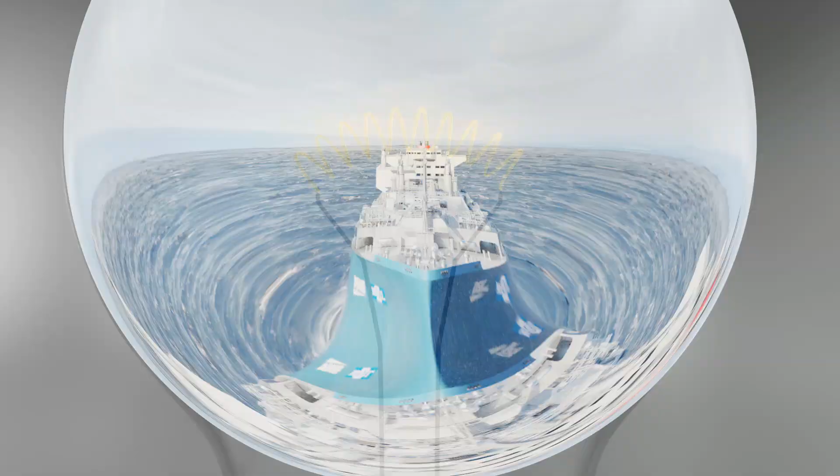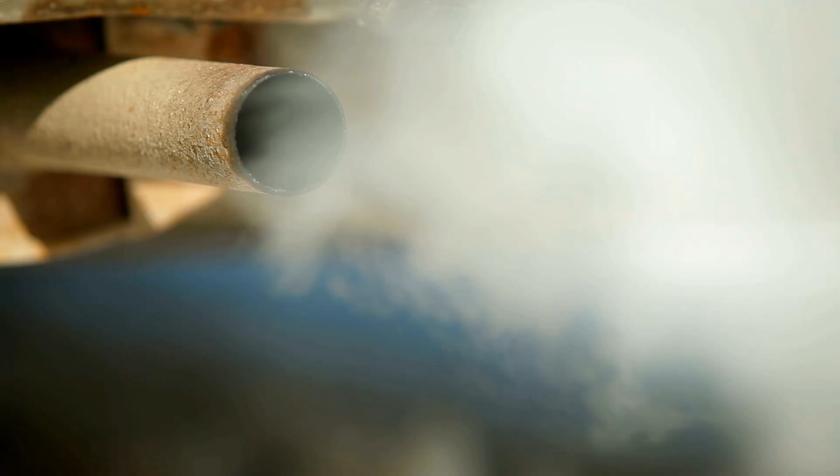In a world striving to balance continuous economic growth with reduction of greenhouse gas emissions, LNG is a realistic and reliable energy solution for mitigating CO2 emission. However, the energy loss within the LNG supply chain has been an issue.

DSME, the leading builder of industrial ships, and MOL, a top-class international shipping company, have jointly developed a new LNG regasification technology. It can reduce fuel usage and environmental impact by utilizing the cold energy from LNG.

This technology has secured the official approval of the Classification Society. And for the standard design, HAZID, HAZOP, and RAM study were conducted for verification of standard design.

CPR was developed based on DSME's proven technology for LNG system and MOL's excellent experiences in LNG vessel and FSRU operations. When this technology is adapted to FSRU, the fuel consumption and CO2 emissions are reduced significantly. Approximately 55% of reduction is possible depending on the temperature of the seawater.

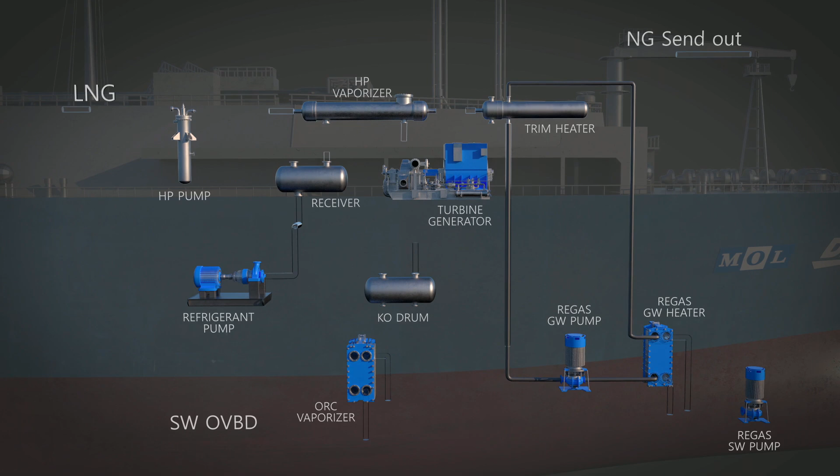This system is derived from the organic Rankine cycle. In terms of thermodynamics, it is similar to a power plant utilizing steam turbine. The process uses commercial refrigerant as a working fluid. Heat from seawater is transferred to LNG for LNG regasification.

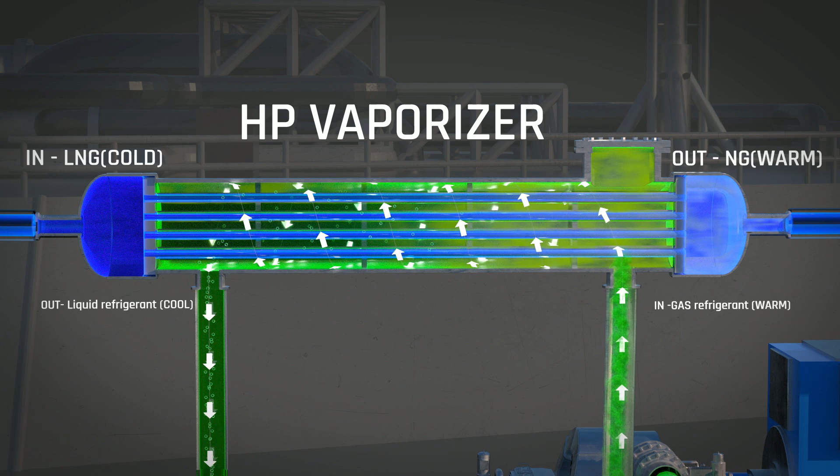In the HP vaporizer, the warm refrigerant vapor is cooled down and condensed by exchanging cold heat with LNG. Then the liquid refrigerant is pressurized by refrigerant pump and vaporized by exchanging heat with seawater.

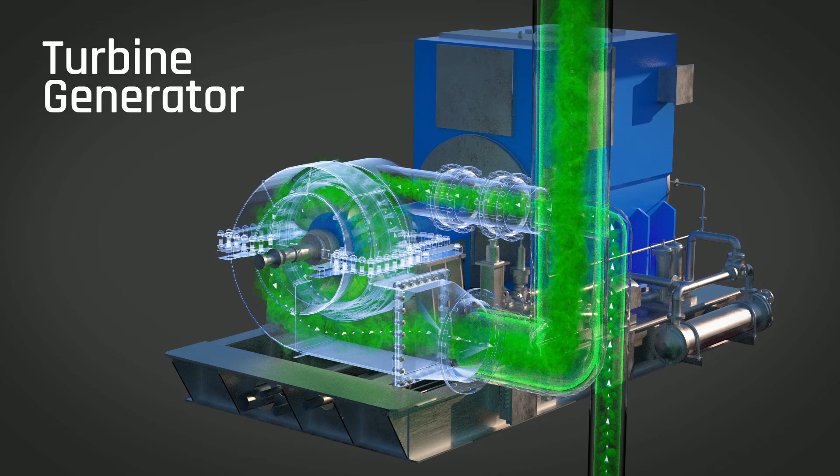The kinetic energy from this high-pressure gaseous refrigerant is applied to rotate a turbine impeller, and an alternator produces high-voltage electricity.

DSME's long-standing expertise in regasification technology and MOL's experience in FSRU operation were combined to derive the best design. The verification was completed through a pilot-scale test prior to applying the technology to the commercial project. And the lessons learned through operating the experimental facility were reflected in the standard design.

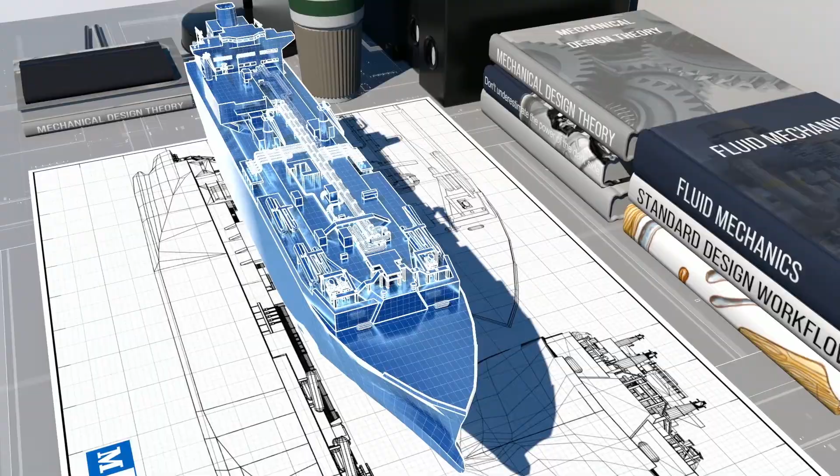To verify standard design of CPR system, a small-scaled pilot test facility was constructed at DSME's Energy System Experimental Center. This center is located at DSME's Okpo shipyard, and it is fully equipped to conduct actual LNG test.

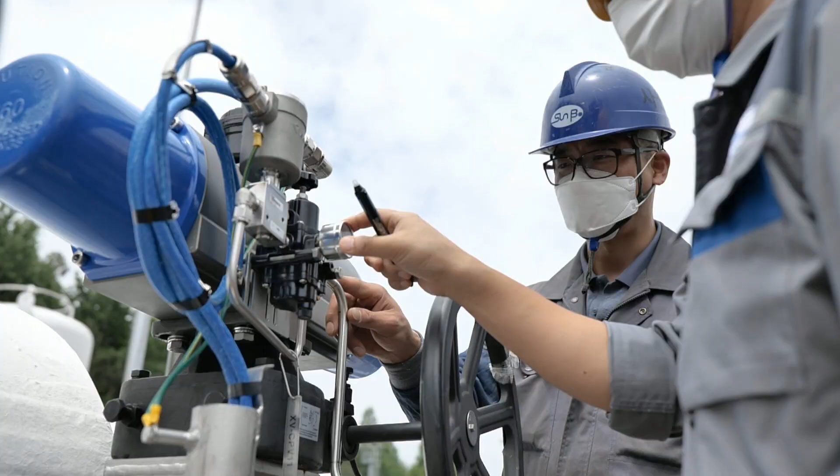In order to compare the theoretical design and actual plant behavior, DSME and MOL performed in-depth tests for various operating conditions, including abnormal situation. And the results were logged and analyzed systematically.

All measured data from the pilot plant are logged on a data server that is located remotely from the Energy System Experimental Center.

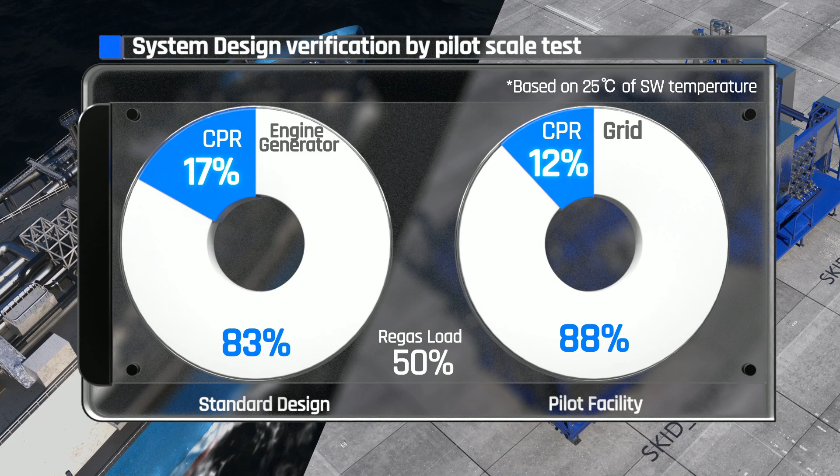With various regasification load, the electrical consumption was compared for the standard design and the test result. And also the difference of turbine output depending on the seawater temperature verified by CPR pilot facility.

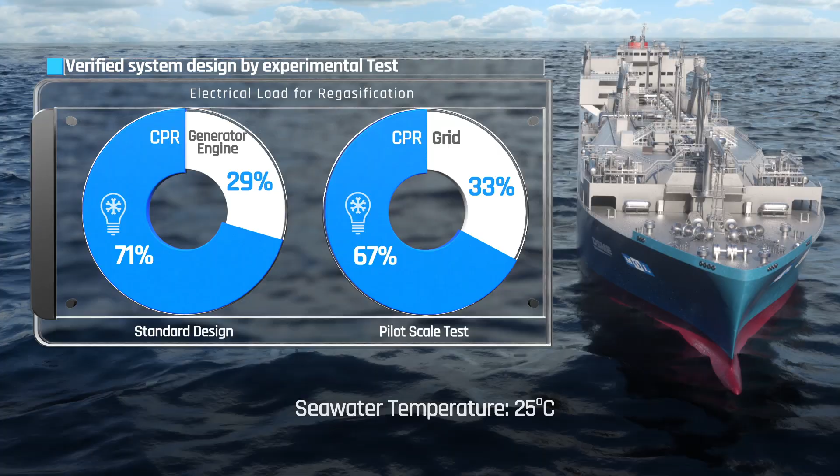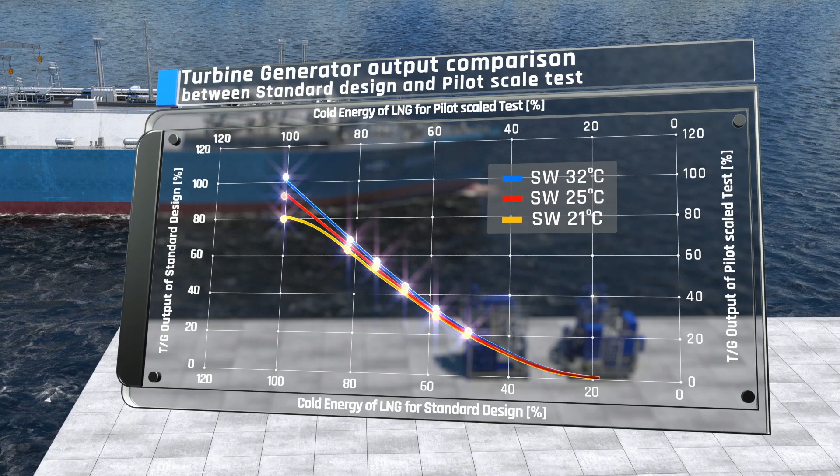As indicated in this graph, the recorded performance of the CPR pilot plant was consistent with the theoretical expectation within error bounds. Consequently, the cryo-powered regasification system could be fully verified.

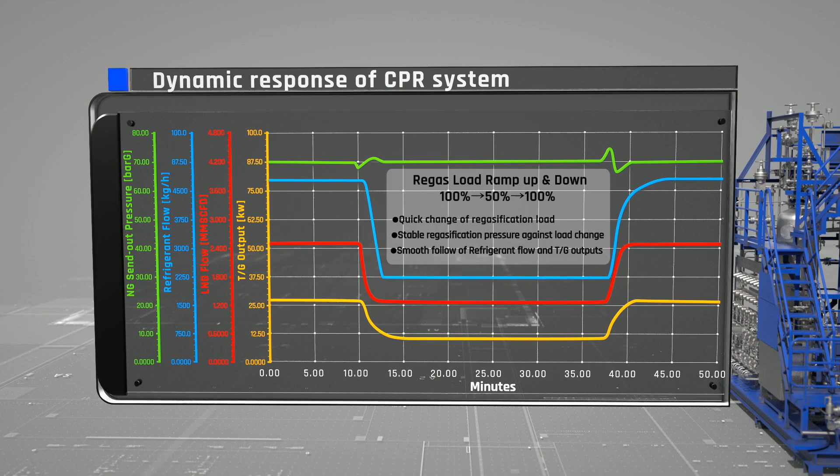Developed process control logic using dynamic simulation is applied to the test facility. Eventually, the dynamic behavior of actual system could be verified by the pilot-scaled test.

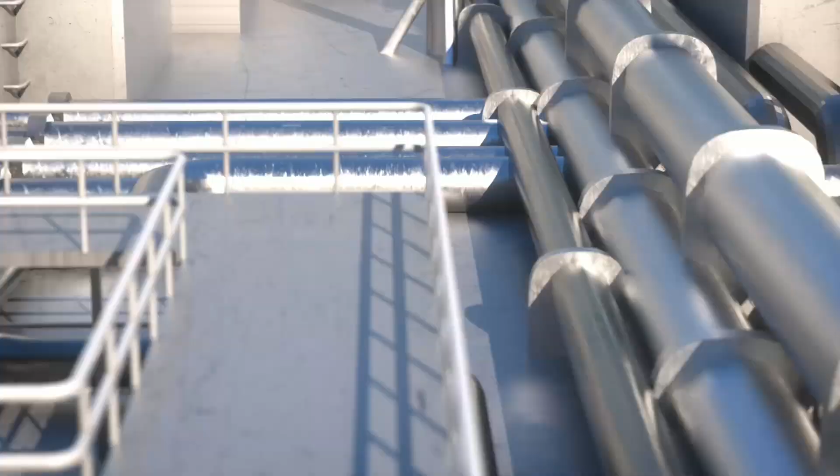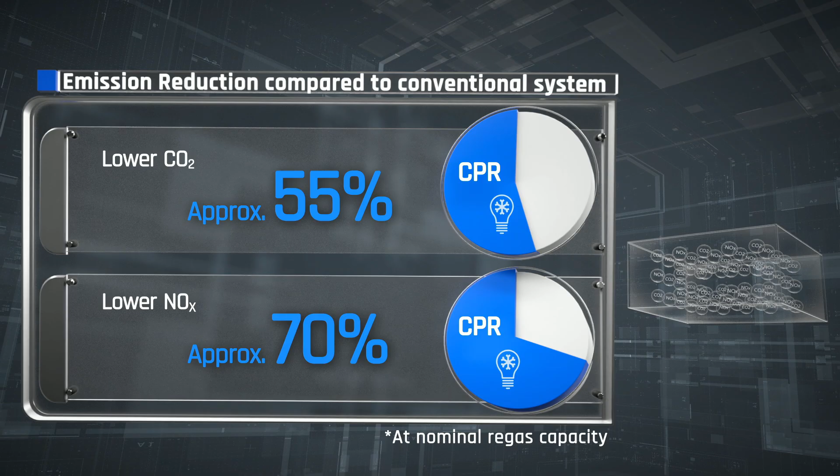By applying cryo-powered regas, which has been verified through such an elaborate experiment, the environmental impact can be also minimized. Based on the design seawater temperature, the CO2 and NOx emission can be greatly reduced, about 55% and 70% respectively. Finally, DSME and MOL can be launched in the market with conviction.

DSME and MOL completed the demonstration of the cryo-powered regas system successfully. Reliability of this system was also confirmed with the classification society, and I'm quite confident that this technology will be applied to actual FSRU. Indeed, we are currently discussing with several customers and receiving positive feedbacks.

MOL will contribute to providing advanced eco-friendly technologies to the world through innovations like cryo-powered regas FSRU.

The world has been changed towards a carbon-neutral and eco-friendly paradigm. DSME and MOL, we will build a clean future with leading energy technology that surprises the world that everyone wants.